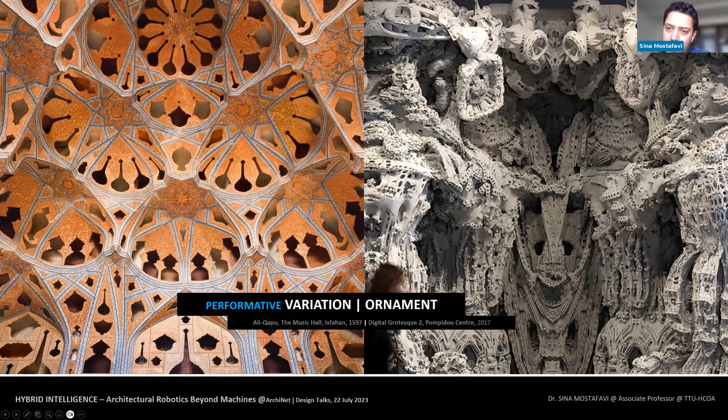While we are designing, how can we look beyond the finished and commercial building products or materials by looking into the sequence of construction and the constraints and potentialities of different production setups? How can we learn from the history of craft and construction, and what other industries such as the automotive industry have to offer to architectural production?

How do we build livable spaces? Which methods may be used? For instance, what are the fundamental differences between subtracting material out of a mass, like the case on the left, versus adding or assembling matter or elements to build up the target design, like the case on the right? And how may these different building methods result in new models of materializing architecture, and how may they alter past and present applicable models or make future visionary models feasible?

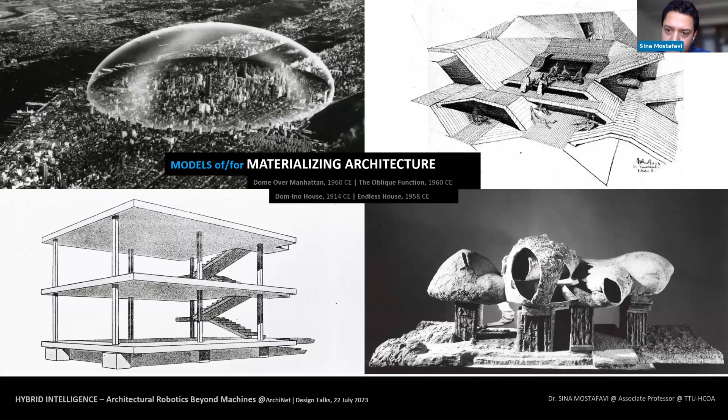In this context of materializing architecture, what is the role and impact of design media in general, and representation, simulation, and computation technologies in particular? In an interdisciplinary setup, what role can designers and architects play to develop advanced, tailor-made design media for more efficient products that may save lives and matter?

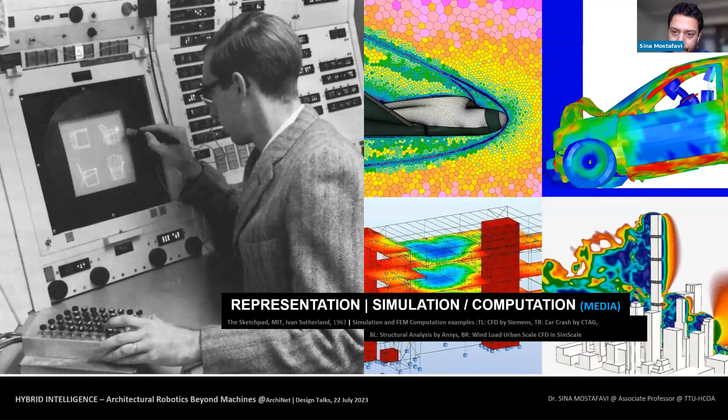So in a nutshell, the general question is how emerging technologies are transforming the experience and practice of architecture. But to be specific, we can replace these two words, emerging technologies and architecture, with more specific terms. Here we are mainly focusing on architectural materialization, robotics, and what we call hybrid intelligence.

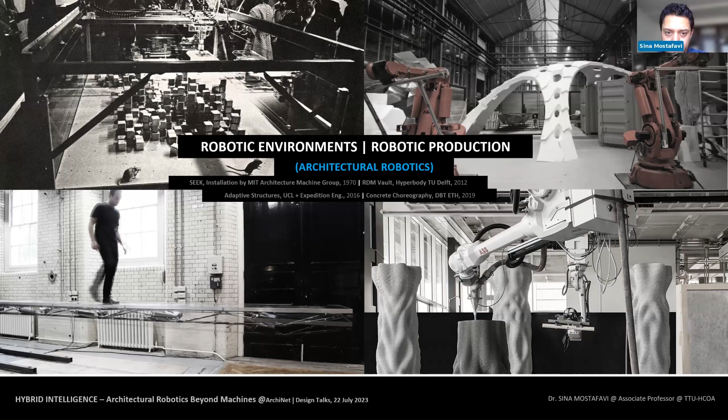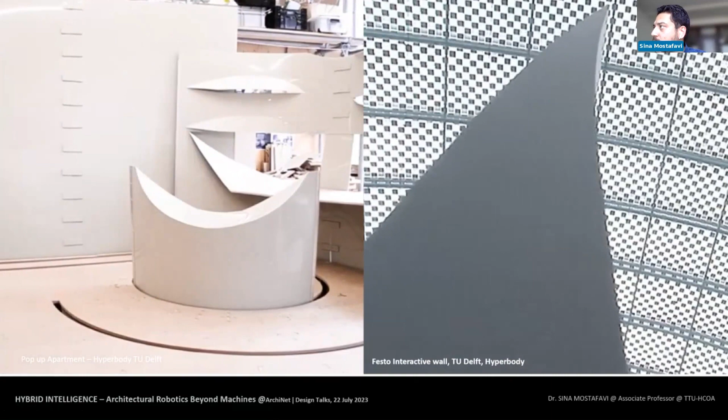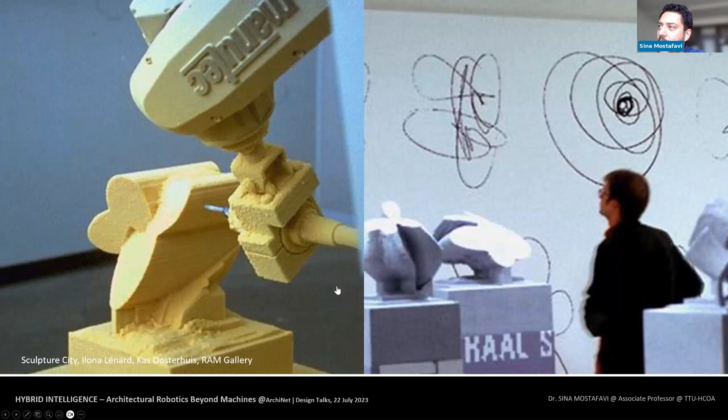When it comes to robotic environments, it's about how, by embedding actuatable systems, we can customize our livable environments. For instance, when I joined Hyperbody Research Group at TU Delft, this was one of the very first projects I've seen, where by creating smart materials, we can activate a wall to accommodate different functions, and so on and so forth.

But architectural robotics is also about how we can create what I call immediate or instant connection between digital space and physical space. One early example of this immediate materialization is how we can translate a 2D impressive drawing by an artist into a 3D sculpture carved by a robot. This immediate connection between the digital and physical is something we achieve because of the programmability and customizability of robotic systems.

Again, it's about bridging the gap between design and construction by developing integrative design production systems, where we have the component of computation, the component of automation, and the component of materialization, in order to create a difference in making and make a difference.

Getting towards the second part of my lecture, I'm going to browse through several projects with a categorization that I'll introduce later, and then we'll proceed to the last part.

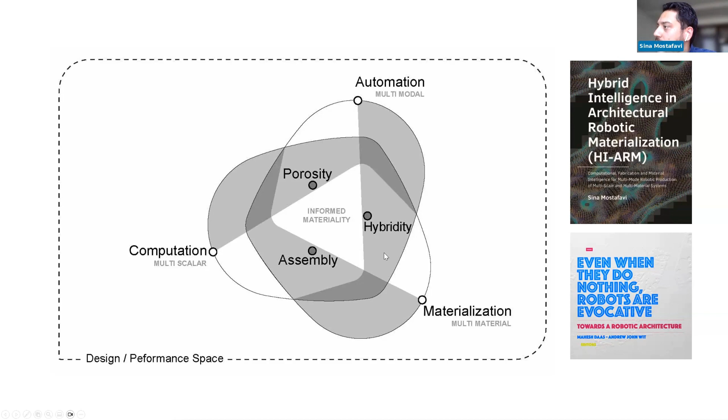This is the framework I've developed over the past years, which is also summarized in a book I wrote, a summary of the PhD work I did at TU Delft. It's about how we can provide an integrative framework for robotic materialization. I've divided this into three notions: porosity, hybridity, and assembly, and I'm going to start with the notion of porosity.

Porosity is about how we can control the mass and void relation at different scales of materialization. This is a project I did at TU Delft about how we can translate the result of topology optimization, which is a discrete method, into continuous robotic 3D printing.

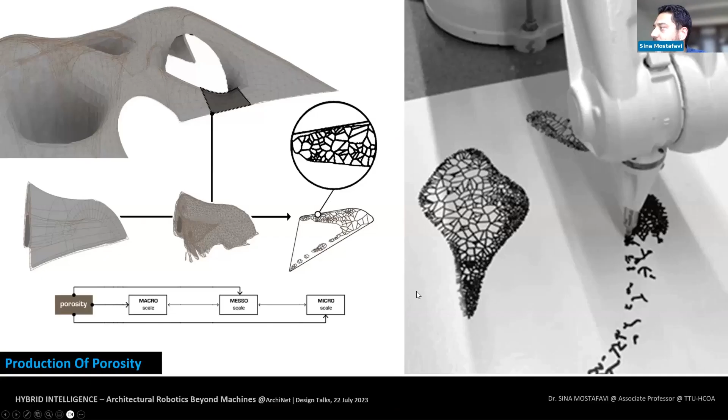As you may imagine, the result of finite element method is usually discrete, and by developing integrative design to production systems, we can translate this result into a printable, continuous toolpath. So we ran several tests and experimental work on how we can translate this discrete result into continuous toolpaths.

As you can see here, we're trying with different materials, including clay or ceramics, and the idea is to deposit material in a continuous manner while keeping the material architecture intact.

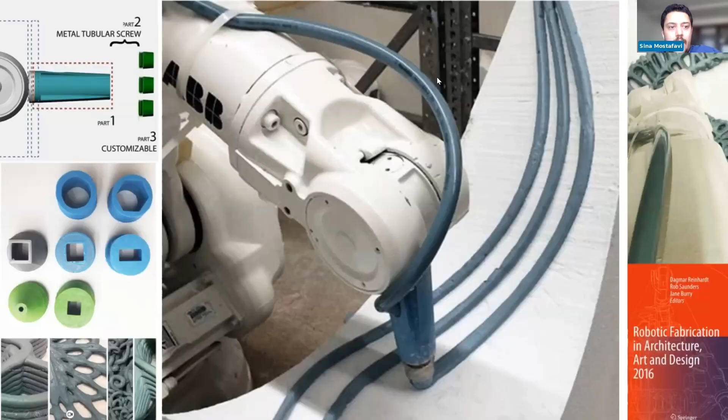We were also customizing our end effector, because working with different materials requires different resolutions. If you develop your system for ceramic 3D printing, it would be different than concrete 3D printing. So we are bringing the world of material, computation, and production together to find an optimum specification and customize our production system accordingly.

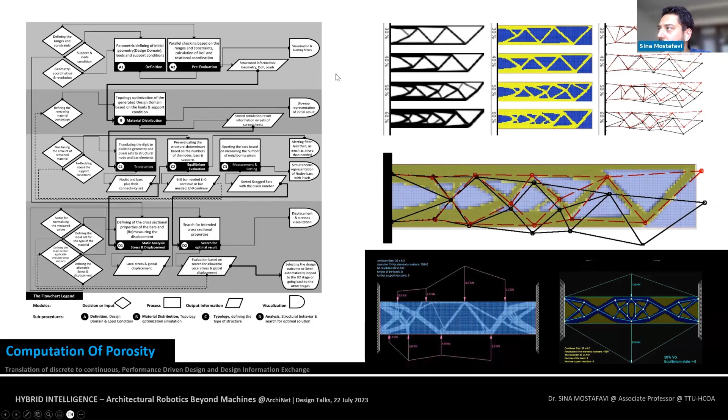This is also based on another project I've done, about again translating discrete results into continuous results. As you can see here, we're translating the discrete result of topology optimization into continuous vector-based geometry, using a method developed with a Python script, which searches within the point cloud that is the result of structural optimization, and in a continuous manner deposits material where needed and as needed.

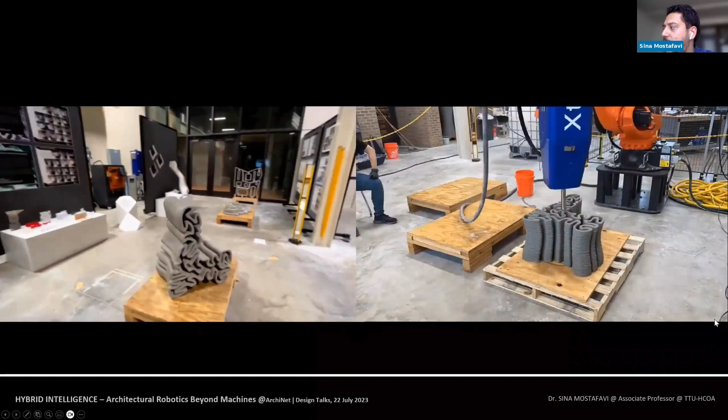Some similar projects I've recently done at Texas Tech University also applied a similar workflow and techniques. For us, it's really important to see how we can think about the agency of fabrication early in the design process and inform our materialization techniques accordingly.

The second topic is hybridity, or what I call hybridization of production methods and hybrid materiality. I see this in two different categories: one is hybrid materials, how we can think of combining and integrating multiple materials. Therefore, we need new computational design workflows and approaches to compute hybridity, especially with the advent of multi-material 3D printing systems.

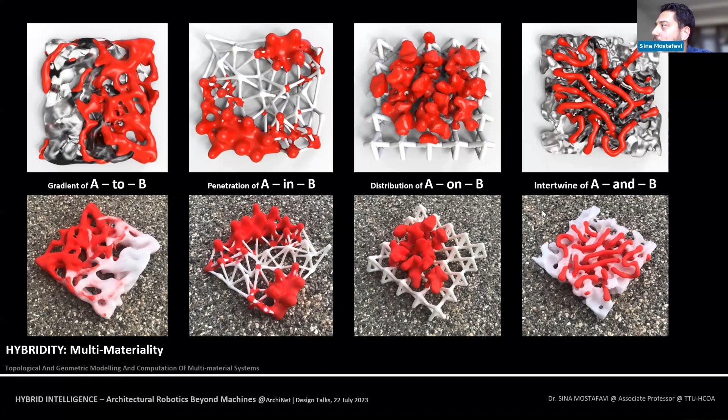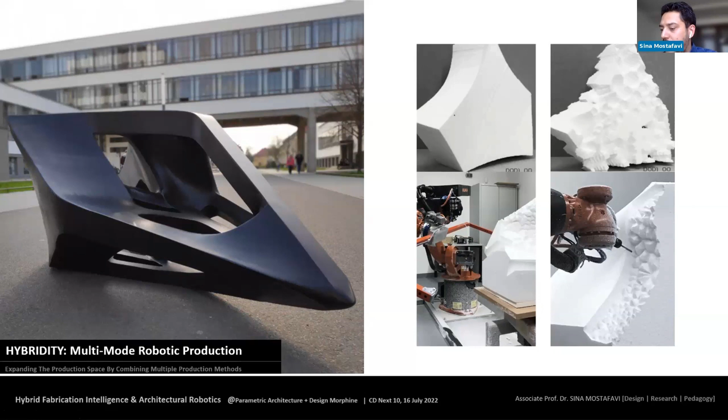This seems to be a very viable and applicable solution. At the same time, it's about hybridization of production methods. And hybridization does not necessarily mean that we are going to hybridize additive or subtractive methods. For instance, we can also think of hybridizing production techniques by combining two subtractive methods to make the whole process of production more efficient.

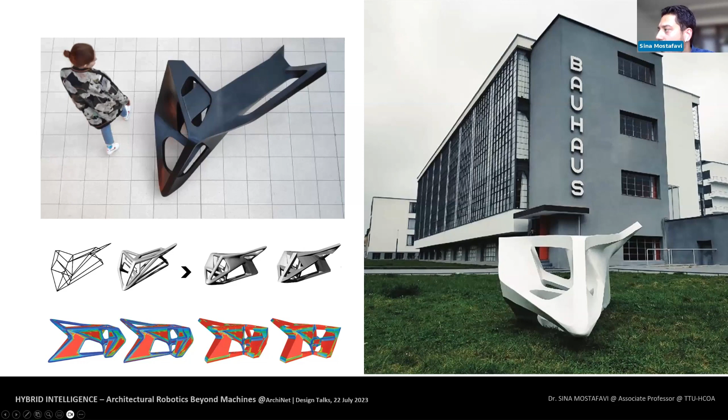In this case, you see how hot wire cutting is combined with milling. Hot wire cutting is only applied where we have developable surfaces, and milling is only applied where we have curved surfaces. So by hybridizing the production system, we can make the production and design more efficient in terms of fabrication and materialization. I'm going to go to three projects addressing the notion of hybridity.

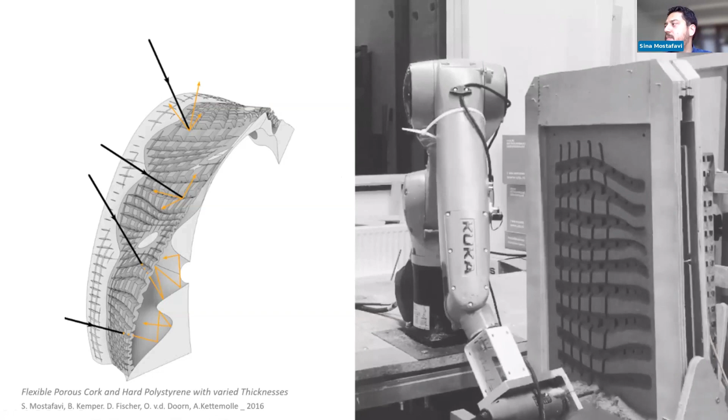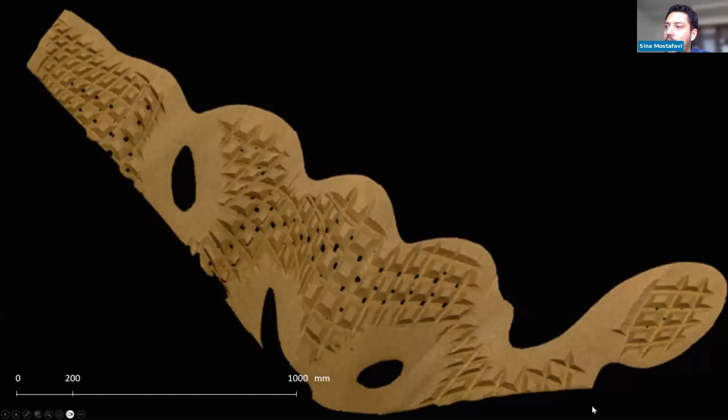The first project is Hybrid Cork, where we are approaching milling in a different way rather than crushing the material. Here, as you can see, we are peeling off the material. So in this way, we are basically embedding a kind of controlled flexibility in the material, which is by definition hard. This controlled flexibility results in basically translating or transforming a 2D material into a 3D bendable material. In this case, we use it as an acoustic panel.

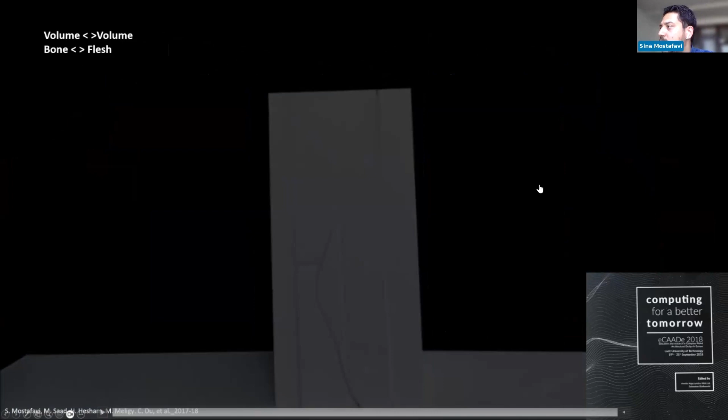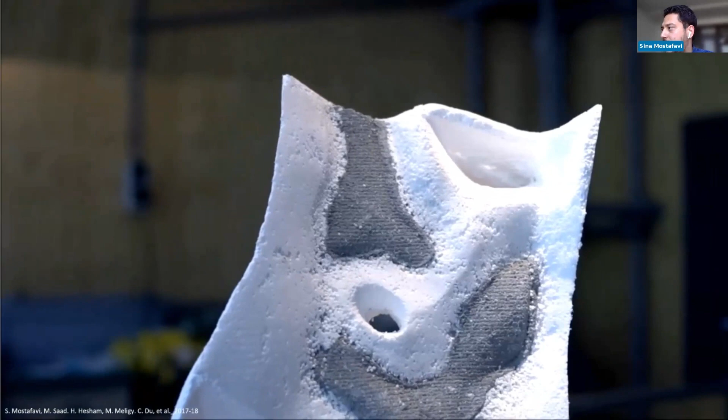At the same time, hybridity is about hybridizing different material systems together. So combining, for instance, concrete, which is a structural material, with EPS, which can be an insulative material. In this project, we were looking at how we can rethink how we usually see molding or casting. In this case, for instance, we are looking into a 4-part mold instead of a 2-part mold. This results in keeping part of the mold as part of the building components, where both materials are continuous, and the concrete is holding the EPS in place in a three-dimensional way, holding the two pieces together.

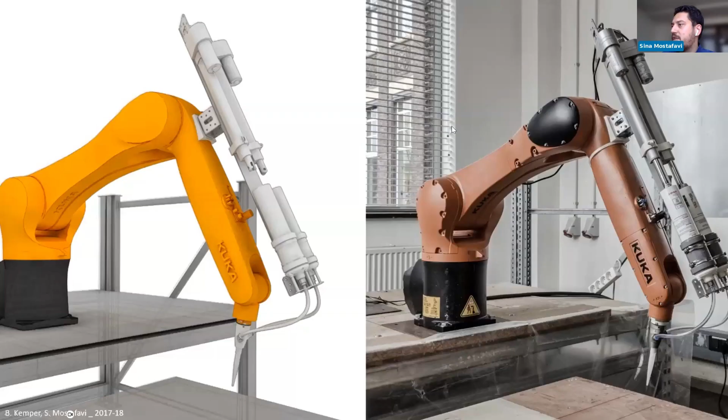Another dimension of hybridity is about how we can combine different methods of production together. In this project, we were looking into how we can 3D print silicone, which by definition is a very viscous material and hard to print. We were developing different end effectors, and then running series of tests to understand what is the right speed, the right design, and the right material properties.

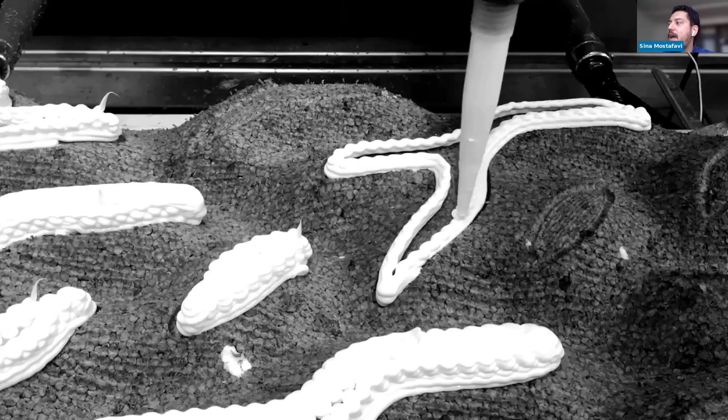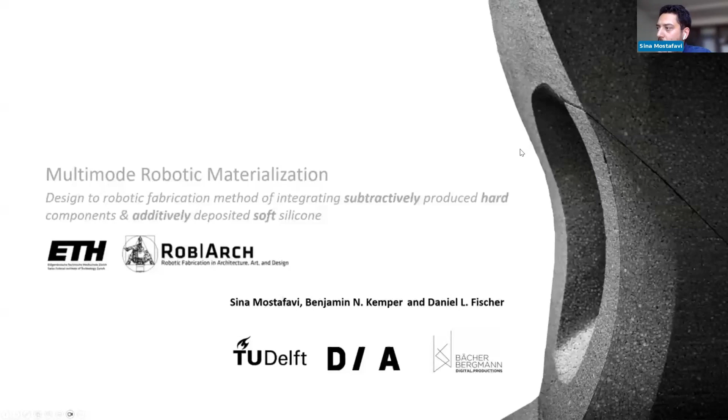This results in a product design project, which is about applying this soft material on a chair, called the hybrid chair. An overview of the production and design process is also summarized in this.

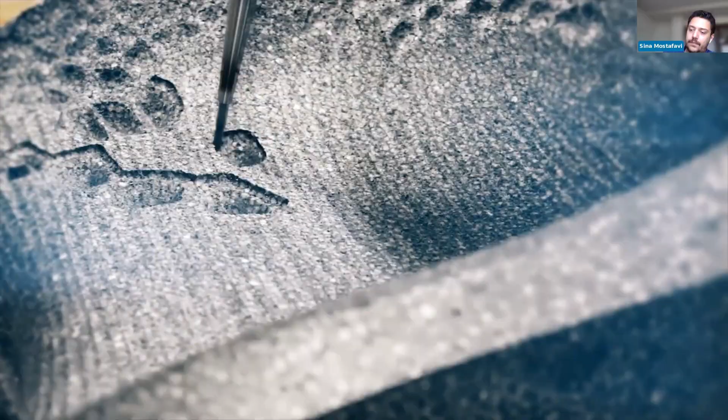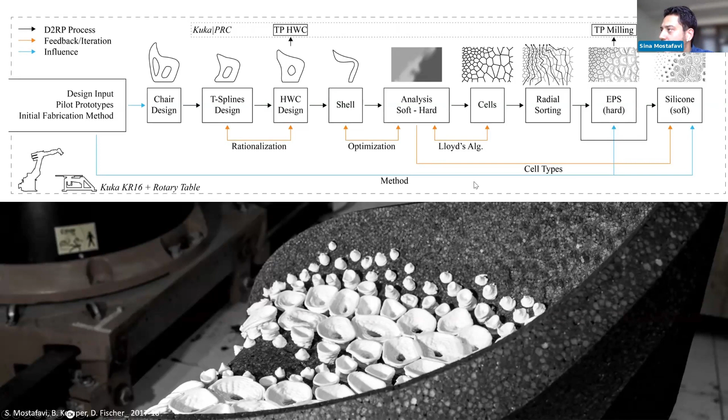Again, we are interested in developing integrated systems where fabrication is a very strong component in the design process, and it provides a feedback loop to what we design in terms of fabrication ability and being able to materialize our design alternatives. The sequencing is also very much important, not only for optimizing the production process, but also for excluding collisions between the tool and the object while designing and producing the piece.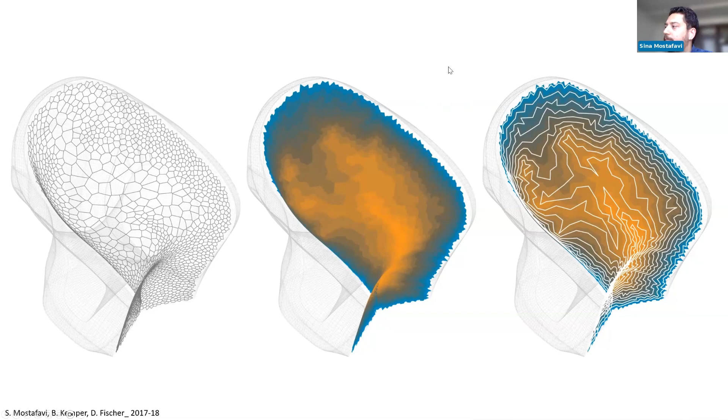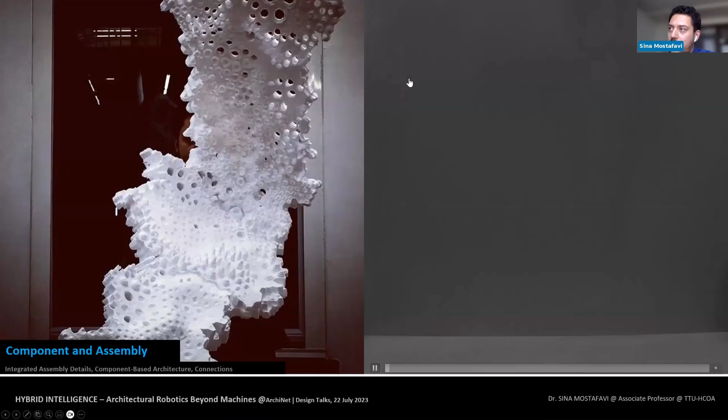The third component is assembly. So we had porosity, hybridity, and assembly. Architecture, in contrast with other industries like automotive or electronics, is something usually bigger than the size of the production setup. So what I call assembly intelligence, or the notion of component and sequencing in construction, is going to be very important. Part of assembly is about how we can embed assembly logic and interlocking logic into our components while we are producing them.

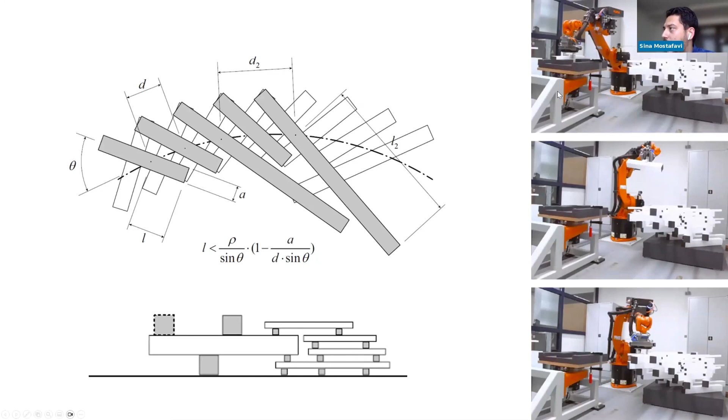At the same time, we look into the sequence of assembly using robots. For instance, in this case, you can see we are using a well-known method of stacking, but at the same time, we are looking into stacking in such a way that while stacking the elements, at any given time during the production process, the stacking is stable. This requires embedding the constraint—not only the constraint, but also the potentialities of the fabrication system and the very physics of the work we are proposing to the design-to-production process.

Here is another example of assembly intelligence, where I borrowed this notion of one building, one detail from Kas Oosterhuis, having one detail but varying that detail such that with one programmable system, we can produce ranges of different components, while the production system allows us to create complexity that benefits us in multiple ways, including structural stability or structural optimization.

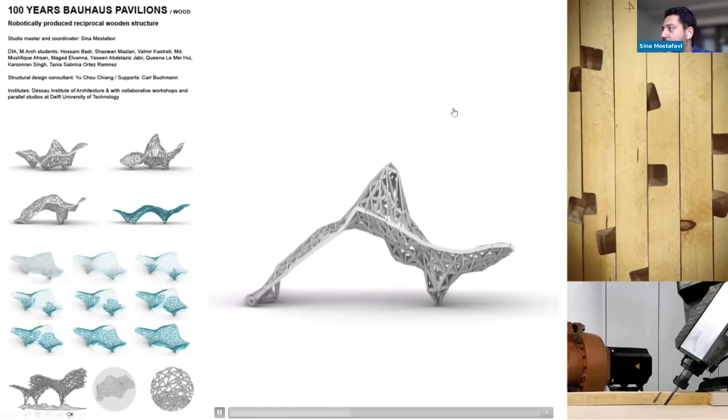This is the 100 Years Bauhaus Pavilion that we designed and produced in 2018, which is about looking into milling in a way that considers the fabrication potentials of a 6-axis, or in this case 7-axis, robotic production cell. We also looked into using a reciprocal system on a complex freeform surface, and developed our own tessellation system.

Moving towards the third and last part of my lecture, which will again be a pileup of several projects we have been doing in past years, I would like to provide several statements and a vision about the future of pedagogy and practice, considering what I call hybrid intelligence and these new methods of robotic materialization.

I have divided this part of the lecture into three subcategories: what I call integrative design, which you saw examples of in the previous project; the notion of applied versus experimental, which I think is very important in today's world—we need to acknowledge the difference, but I find both cases important; and the notion of interdisciplinarity.

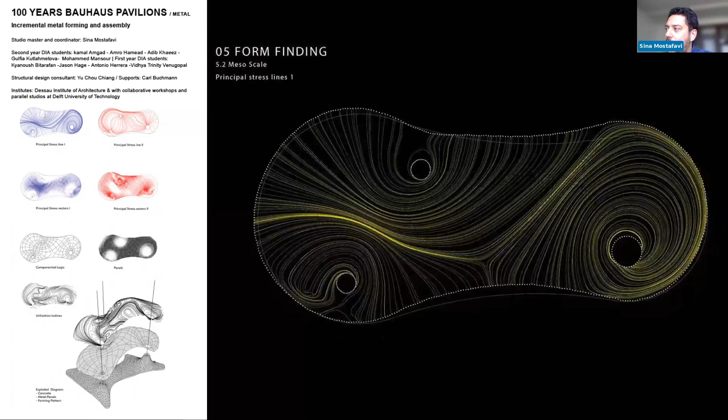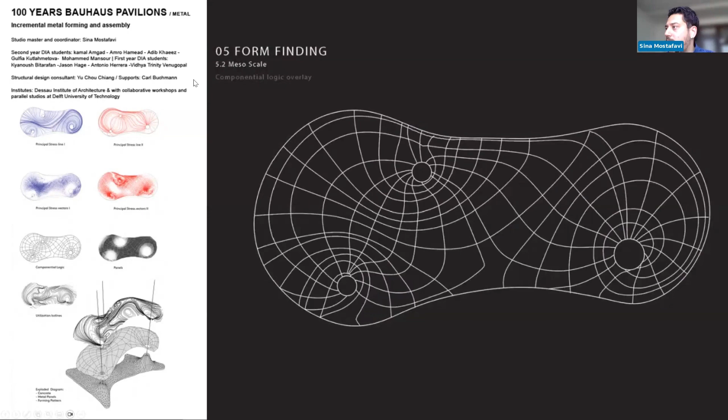Usually measurable criteria such as structure or environment are easier to map, but I'd like to argue it's not only about structural or environmental parameters. Another job of architects today is to see how less measurable criteria, such as functions or environmental comfort, can also become measurable, so we can benefit from the complexity achievable through robotic production.

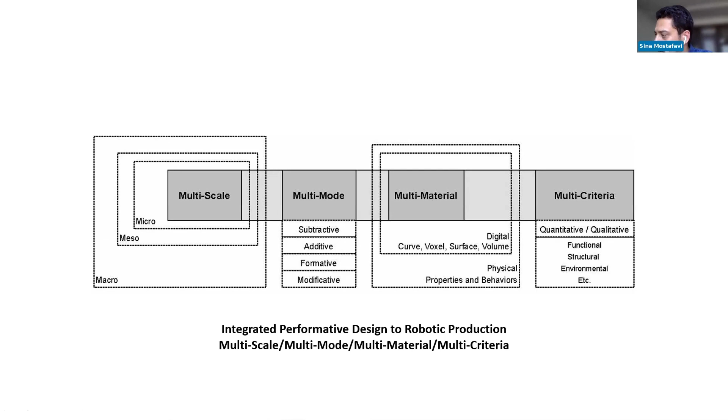Here you see another example of metal forming, where we use a bendable 2D material, and by creating complexity where needed, we enhance the structural performance of each element. In summary, it's about how across multiple scales, using multi-mode robotic production systems and multiple materials, we can develop a multi-criteria design-to-production system.

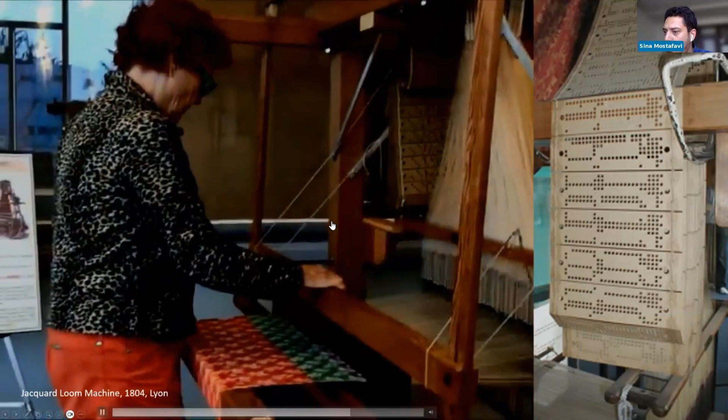It's also about how a very complex production process can be translated into a programmable system. This is one of the very early examples of computers using punch cards to systematically weave—this is a loom machine—translating a very complex production system into a programmable system.

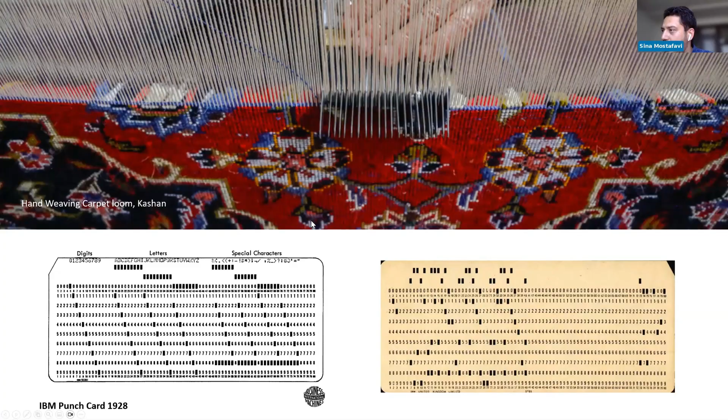It's not surprising to see how the very early examples of punch cards are similar to what we saw in that loom machine. In a way, the whole production system becomes almost like a surgery, where we can map and predict the production process of each component.

This is where simulations become very important, and it's about how we can learn from every single experiment we do in order to create what I call families of objects.

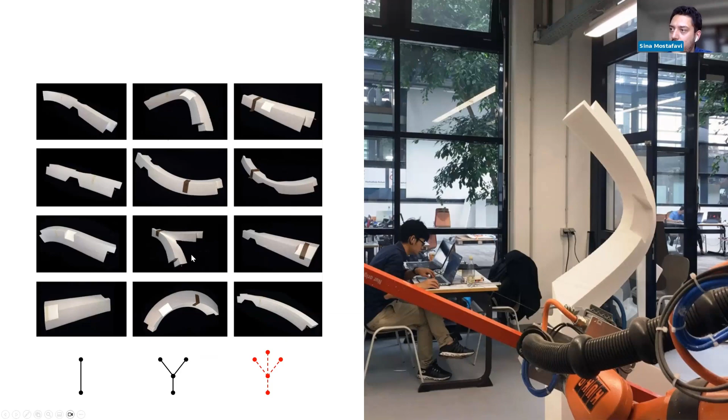As you can see, all these components are mostly I-shaped—topologically similar or identical, but geometrically different—except for this component here, which is a Y shape. But by learning from all these simple I-shaped components, we were able to understand how we could also produce a Y-shaped component and eventually an X-shaped component.

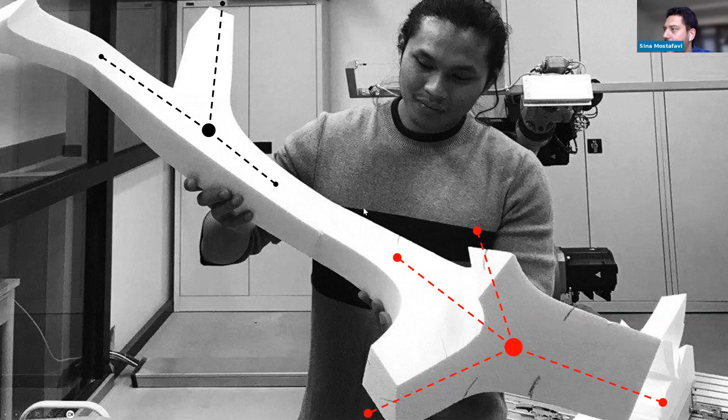So it's about developing this integrative system in such a way that we can map the constraints and potentialities of each system, and then produce what I call families of objects. In summary, it's about how we can bring material space, design space, and production space together and explore them simultaneously.

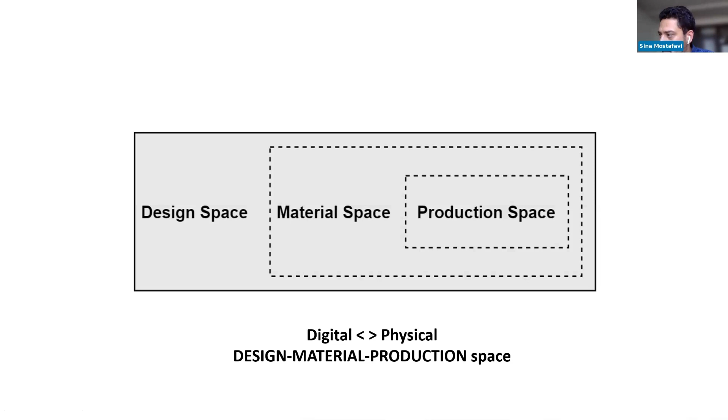The second part, which was about applied and experimental work, I would say to a certain extent, what we do in academia is also informing what we do in practice, and vice versa.

This is one of the buildings I've done through my practice, setup architecture. In this case, we were not using a robotic production system, but learning from the notion of hybridity, we were interested to see how we can use stone construction differently by combining the higher accuracy we get in metal bending and laser cutting with a less accurate material, natural stone. This results in a hybrid material system where each element is stacked in a discrete way on top of each other.

Here we were also interested to develop a kind of material language or material culture where we integrate the facade, landscape, and other interior and exterior components of the projects.

Which brings me to the notion of resolution. While new methods of construction may allow us to work with higher resolutions, I don't think it's only about increasing the resolution, but about how we can find a proper resolution according to the materialization system we develop, and then embracing that tectonic or materiality in our design process.

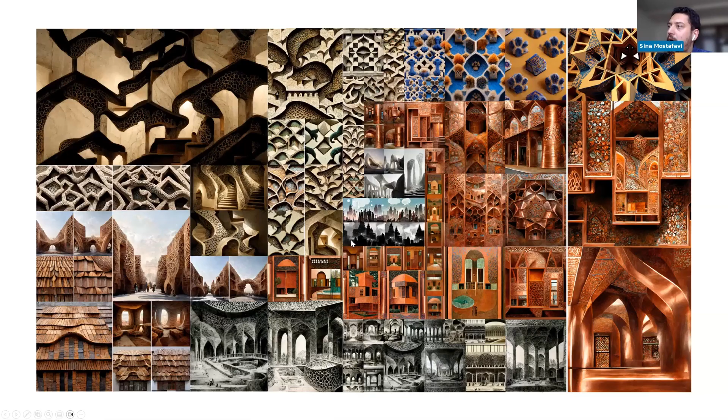When very early examples of generative AI became more accessible through platforms like Midjourney, it was really interesting to see how the very cultural aspects of what we call architecture and materiality are embedded in the data accessible to everyone, and how we can be aware of what I call cliches and biases to some extent, but also cultural constructs.

These are some explorations that we have done using Midjourney AI and generative AI.

A recent work of ours, together with another colleague of mine, Professor Mehan, was about seeing how these very cultural and social aspects of digital information on the internet result in what we called in our recent paper visual cliches and verbal biases.

It's really important and interesting to be aware of these cliches and biases when we are designing and using these new technologies.

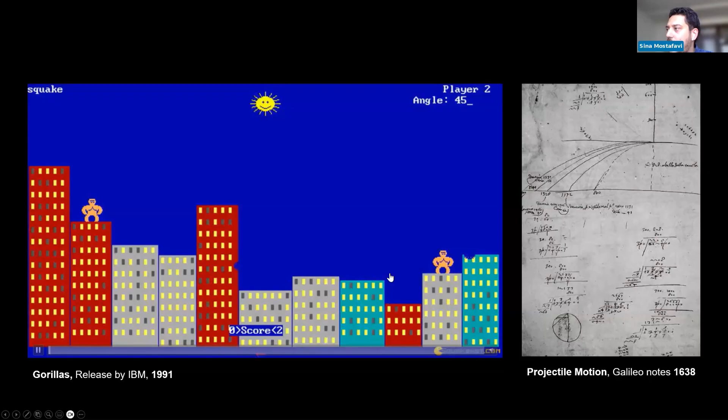So in addition to all those cultural backgrounds to that project, I would argue that the very digital culture that we have now and have grown up with is also part of what we are as architects today. It's not only about the contextual cultural background, but also about the way the digital is creating a culture for us.

This is one of the very early examples of games that I used to play. As you can see, it's very simple, but beyond the fact that this is a simple game, for me it was really interesting to see how a very simple formula creates a very simple simulation here.

Of course, in the studios, especially the thesis studios and graduation studios, I'm interested to see how these integrative systems can result in more, I would say, game-based scenarios, where we are developing integrative design-to-production systems, not only addressing materialization, but also addressing social aspects.

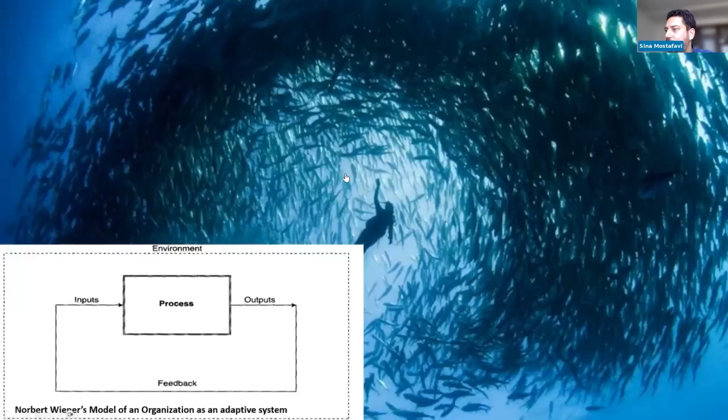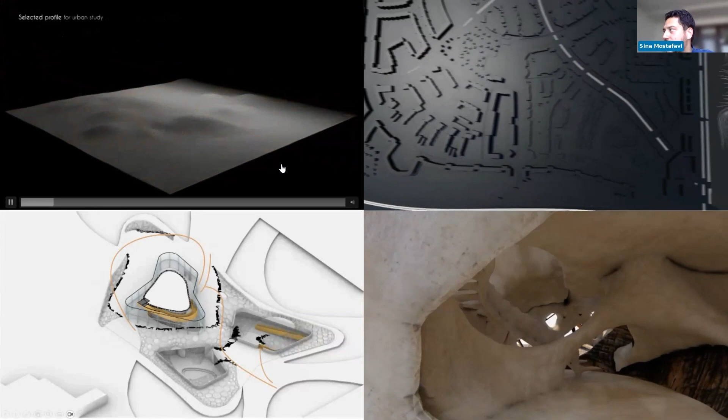These are some examples of, again, incorporating the notion of context and culture into materiality. These are some examples of the studio work in Bauhaus that I've led.

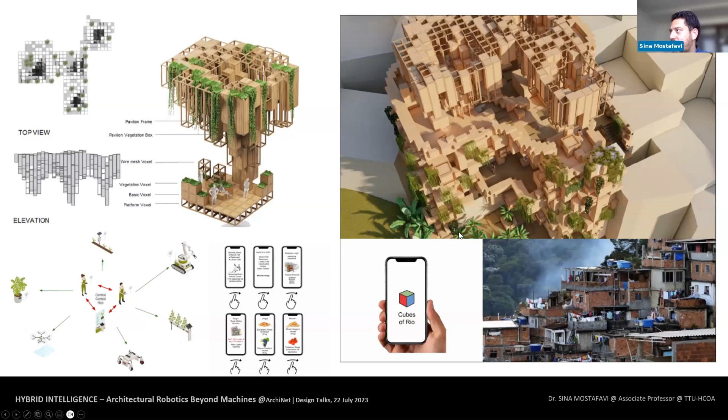Back to the notion of applied versus experimental, I would argue it is important to be aware of the very experimental dimension of these technologies, but at the same time, see how these visionary results can have an impact on real world problems. For instance, in this case, the students were looking into the favelas and developing an app for changing the landscape of favelas to an urban farming situation, towards more applicable solutions.

The notion of circularity or reusing is also another important aspect when it comes to applied versus experimental. This is a student of mine at TU Delft, looking into reusing plastic boxes from the construction industry, running several tests to see how we can develop joints using robotic cutting. Or in this case, a colleague of mine and I were looking into how we can embed a kind of self-assembly intelligence for translating a 2D material to a 3D structure.

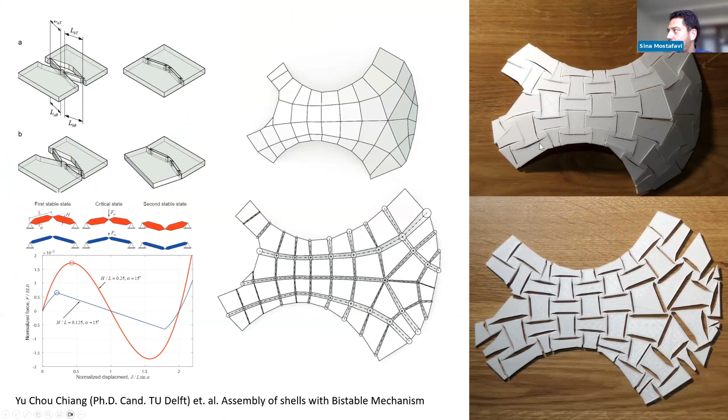So in a sense, in summary, in many levels, the data is the new material that we are working with, ranging from art to the city scale.

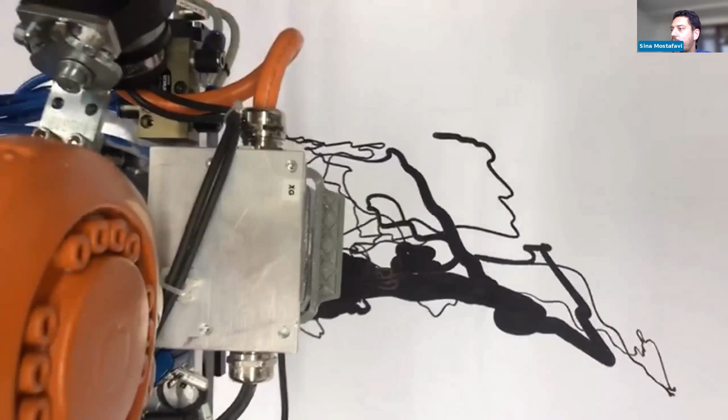Based on this, we were also running several experimental projects. For instance, in this case, we were looking into how brain waves can be directly translated into art pieces. So this notion of personalization is also something that can be important. Or we were looking into how, by quantifying the data from the way we are basically navigating a city, we can create, again, art pieces.

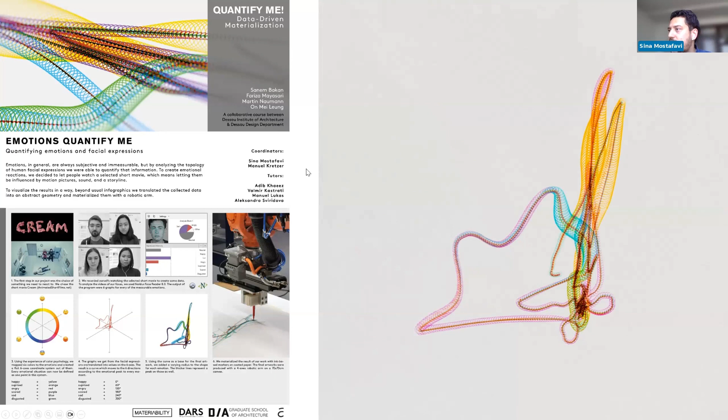These are more toward the experimental notion, but these very small modules of experiments sometimes become a larger component for a larger project. That's important in our pedagogical, practice, and professional framework when using these systems. In another project, they were looking at how facial recognition can result in different artistic expressions. While these are more toward the artistic front of what we've been doing, I believe these small components can later become a component for a larger project.

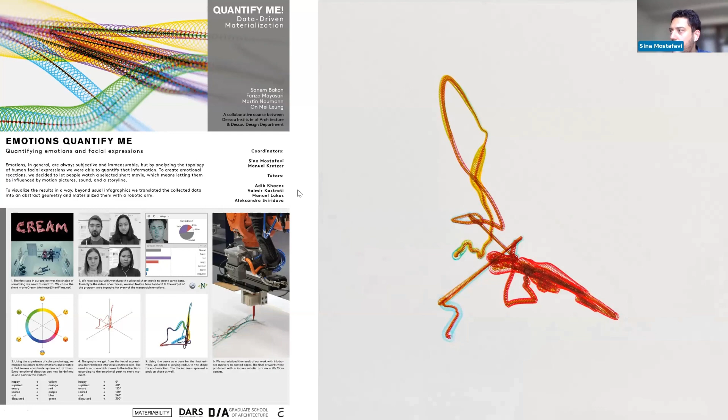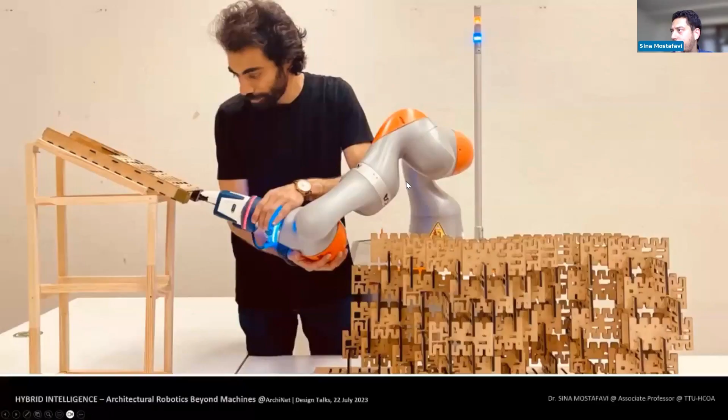Another notion is human-robot collaboration when it comes to interdisciplinary work. I would argue that the next generation of robots in architecture would very much be about how we can collaborate with different types of robots, and how we can build our own robotic setups where humans and robots can seamlessly collaborate.

In these projects, done in collaboration with the Materiality Lab of the Dessau Department of Design, together with Dessau Institute of Architecture students, we were looking into discrete assembly systems using a soft robot, in this case an iiwa. We looked at how we could develop components proper for these types of robotic systems because they are softer, and benefited from this softness.

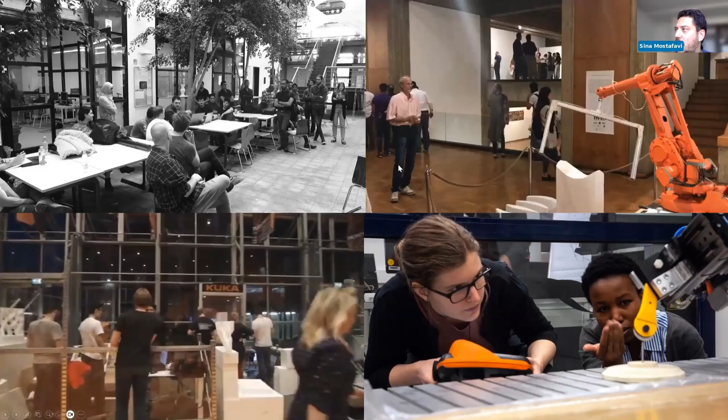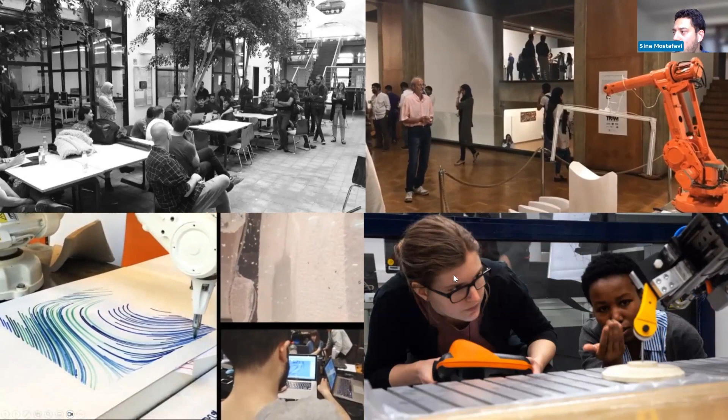To basically assemble this complex structure without using glue or additional material. In terms of how these new methods of materialization, or what I call hybrid intelligence, are changing the landscape of architectural pedagogy, you would barely find me giving lectures like this. It's very much about collaborating with students, researchers, and people from different disciplines, on one hand to hack the robotic systems and benefit from this programmability, but also to answer a very important question.

The last part of my lecture, as I promised, is about interdisciplinarity. I'm going to show two or three more projects. The first is the Audi project, done again in collaboration with the Materiality Lab and also my unit, DARS Hub, in the Science of Architecture. It was really interesting to see how architecture can stretch its reach towards other disciplines.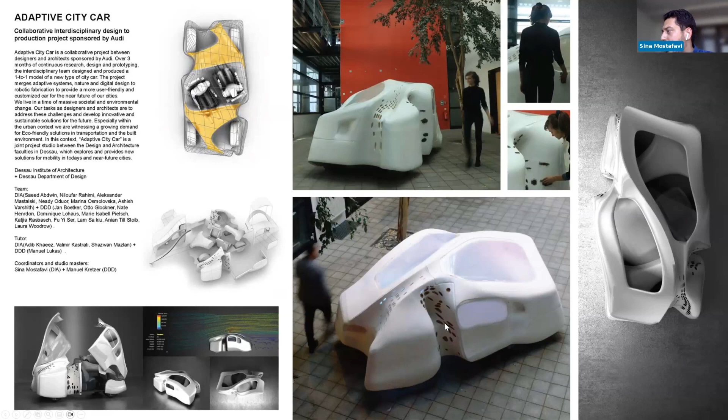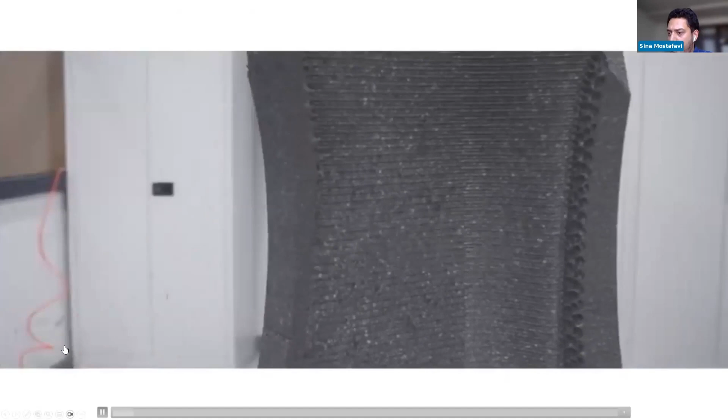So this, in some way, summarized the whole process of production and integrating sensors and actuators into the whole system. And it was also really interesting to see how architects and designers can collaborate together to achieve something beyond the traditional scope of architecture.

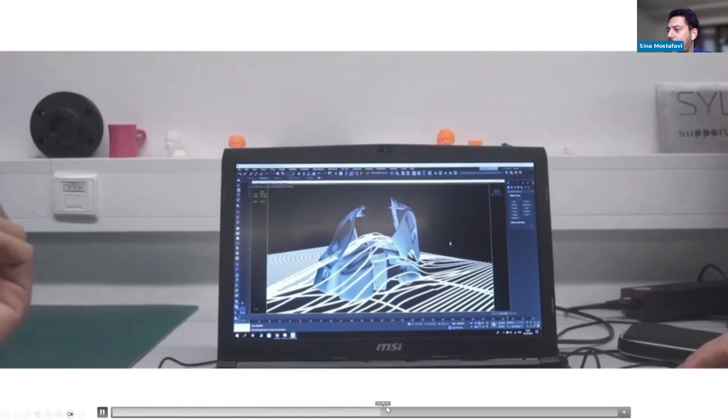Here you can see how we were incorporating sensors and actuators, in this case also using simulation techniques to optimize the body of the car, and integrate different sensors and actuators, smart glasses, and smart lighting systems into the whole body of the car.

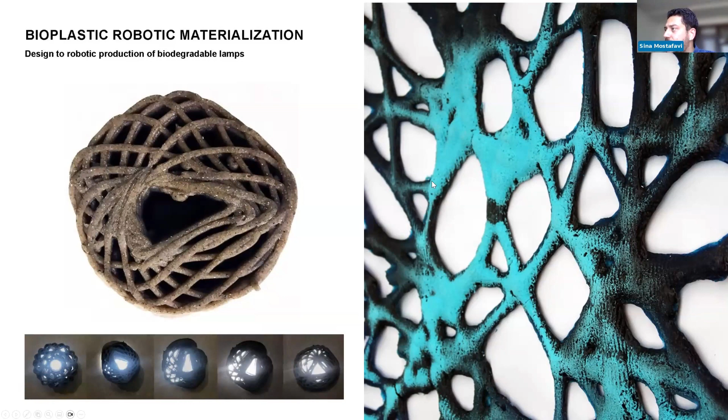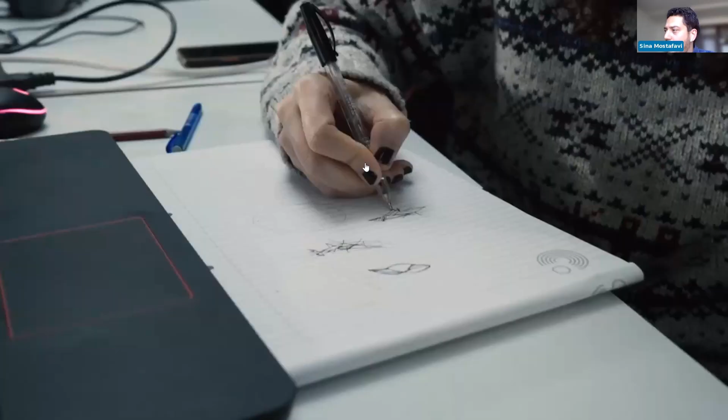At the same time, the notion of interdisciplinarity is very beneficial, especially if you want to develop new material systems. In this case, we were developing ranges of bioplastics and customizing them using parametric modeling or generative design, based on different production technologies that we were using.

For instance, in both of these two cases we are using bioplastic, but the bioplastic on the right is customized for cutting, resulting in a porous structure that transforms a 2D material into 3D, versus customizing the material and production system for 3D printing, where by learning from failures we were eventually able to customize the material recipe for bioplastic robotic 3D printing.

This research has been advanced by a very good colleague of mine, Benjamin Kemper, who's doing his PhD on bioplastic robotic 3D printing in collaboration with ETH.

The last project I'm going to show is a recent project of ours called FabriCity XR, which is a collaboration between the studio I was leading, Design Computation Fabrication at Texas Tech University, together with the studio Professor Mehan was leading on urban community development.

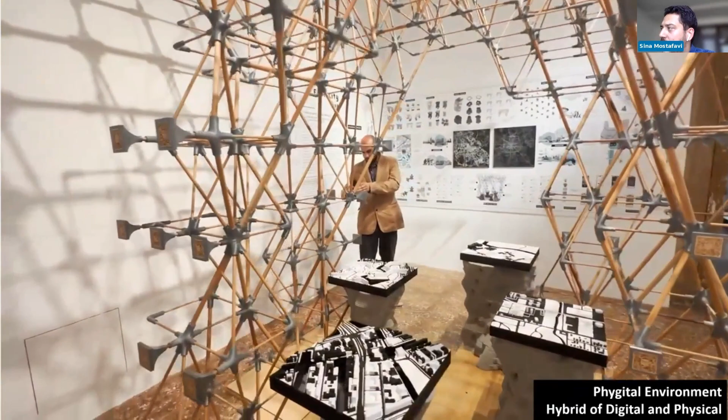In this project, we were interested in the notion of hybrid digital and physical, or what is a phygital environment. So we were looking into the ways we can map digital environment onto the physical environment. This project is currently on display in Venice.

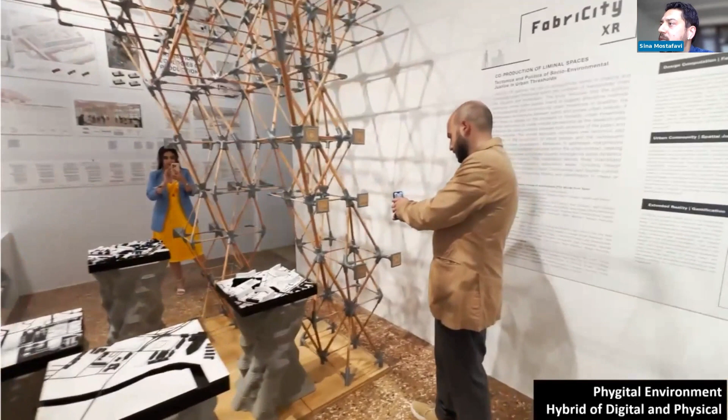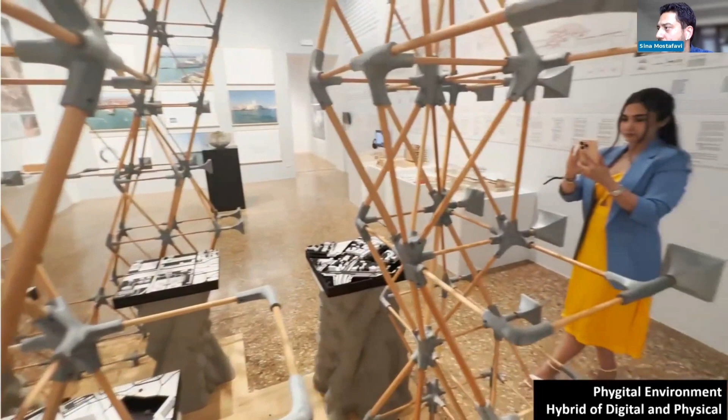Again, with an emphasis on interdisciplinarity, it brings 3 disciplines together, which I'm going to explain in the next slide. It's about how we can map digital information into a physical environment to create an immersive experience for users, where potentially the digital environment can also be modified in real time, creating a new immersive experience beyond what we usually see with only physical environments.

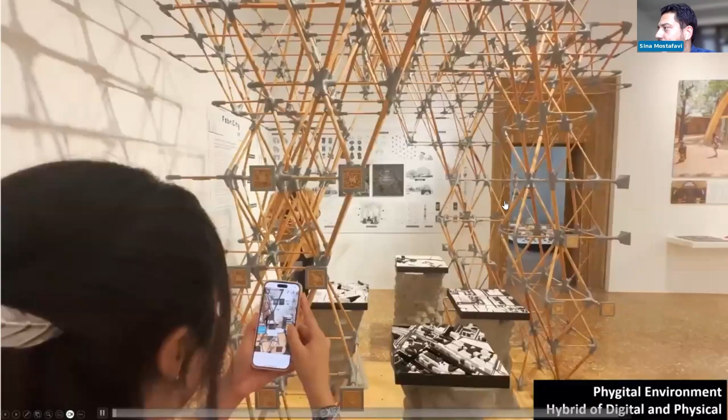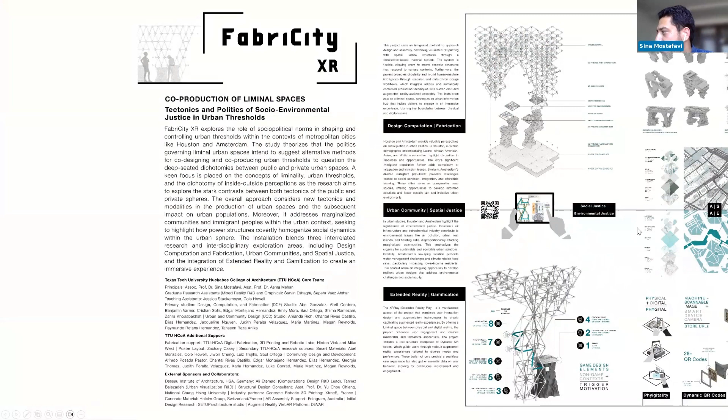As said before, in this project we are bringing different disciplines together, and the scope of the project mainly covers 3 areas: design, computation and fabrication; urban community and spatial justice; and extended reality or gamification, which is about this phygital space I mentioned, the hybridization of digital and physical environments.

As said before, this project is currently on display in Venice, in Palazzo Mora. If you happen to be there, you can visit it. It's going to be exhibited there and stays until November 2023.

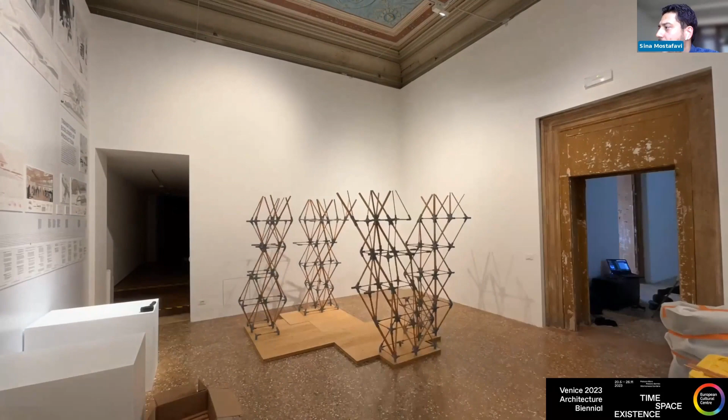And with this video, I would like to wrap up my presentation, where we are using a HoloLens headset to assemble the structure, again using the phygital environments that we developed for assembly.